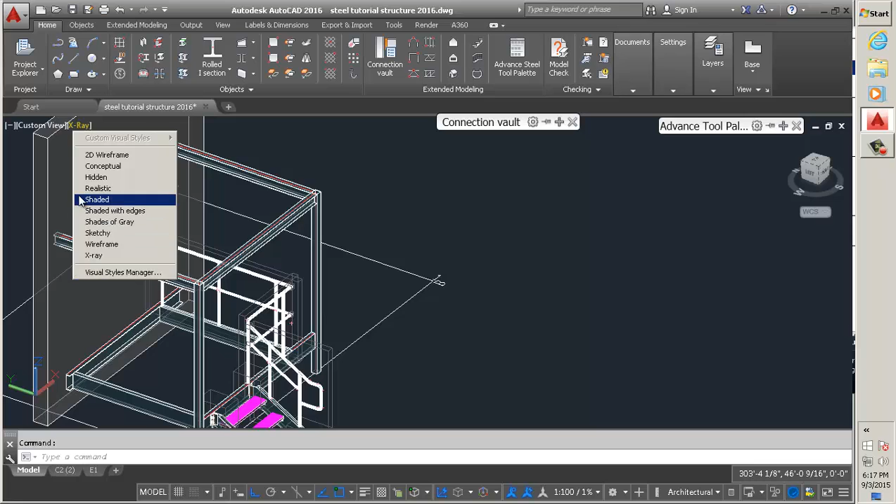And I've recalibrated my mic today. It's a bit louder than my last video, so I hope this works better.

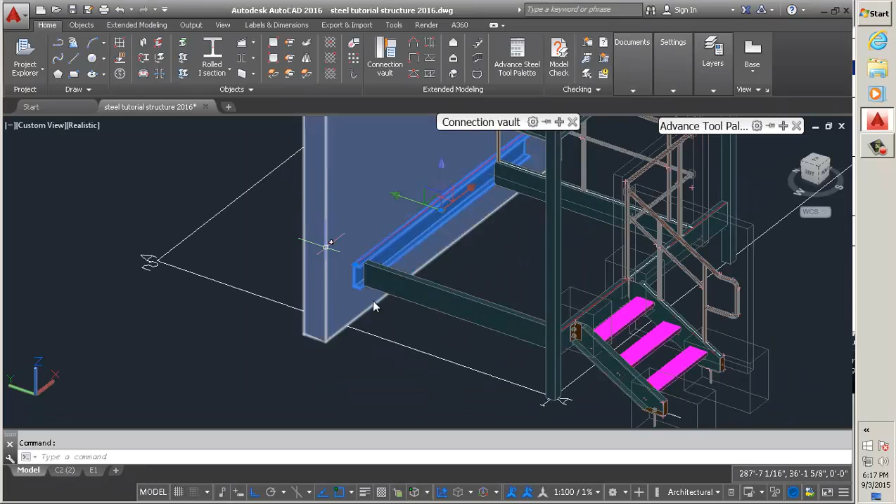Now, first things first, we're gonna start. I'm gonna connect that beam and that beam into the wall, as well as the channel down here. This is a structure I've never made before, so okay.

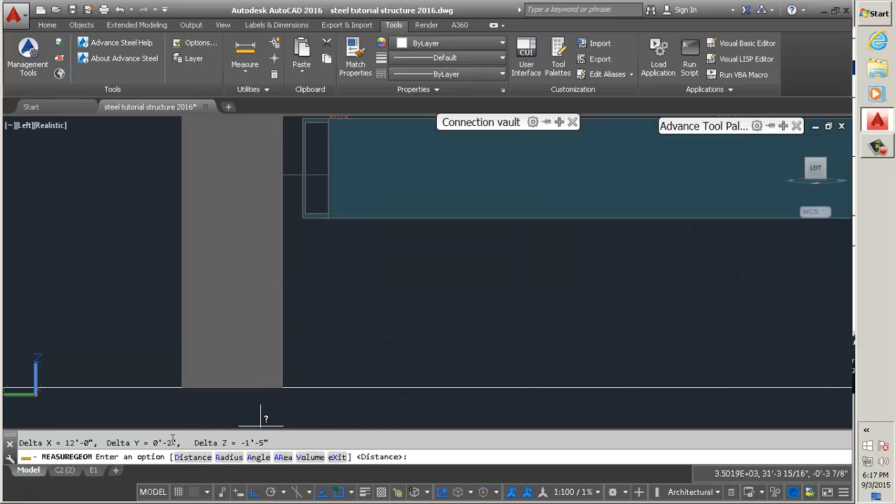Looks like our wall is away from the channel, so just move it in a little bit. We'll just take the measurement from there to there, which is in the y direction 2 inches. So we're just going to move our wall over 2 inches. Okay, so now it's flush, and we're going to go x-ray to see how our beams sit in relation to the wall, and you see they're just about halfway into the wall.

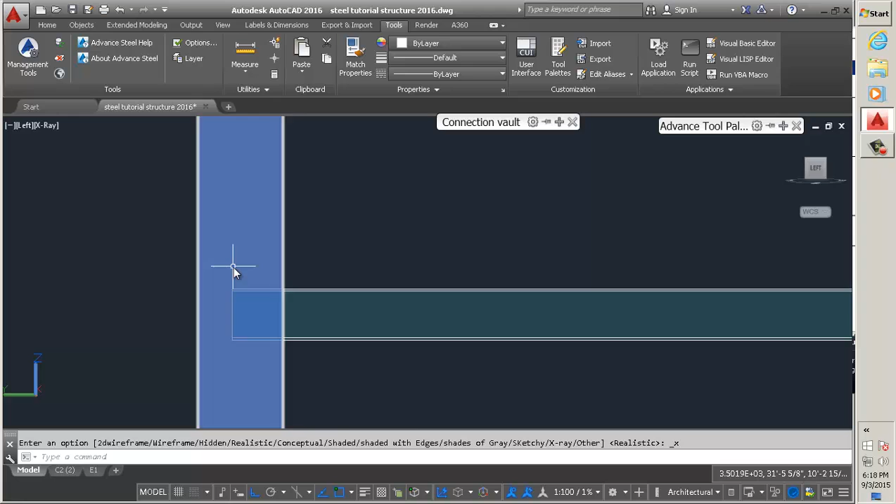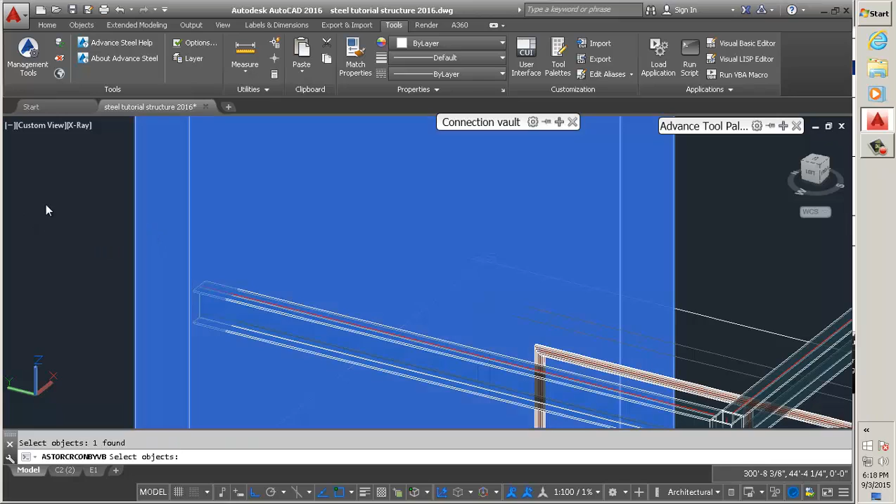Okay, this is my own connection. This is not structurally sound. I'd say it could be, but I don't know. Okay, so I'm going to use the embedded seat. Select our beam, right click, yes, I'd like to select the reference, and then that reference would be the wall. Right click, and I have my angle, my plate embedded into the wall.

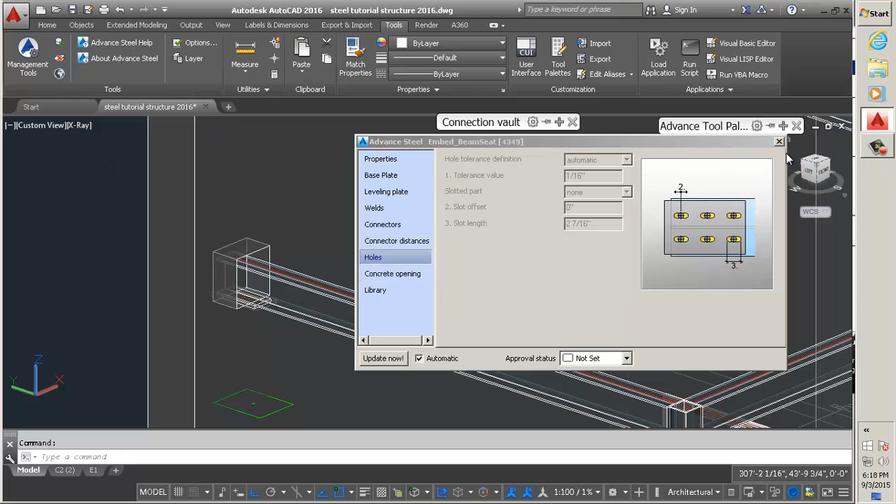But as you can see, the opening is not big enough, so we're gonna just expand that by about, say, 2 inches all sides. And hold on, we're gonna switch to the realistic view so we can have a look at that hole a little bit better, and it gives us a little bit of room here to stick in a welding rod and weld that plate to the beam on site.

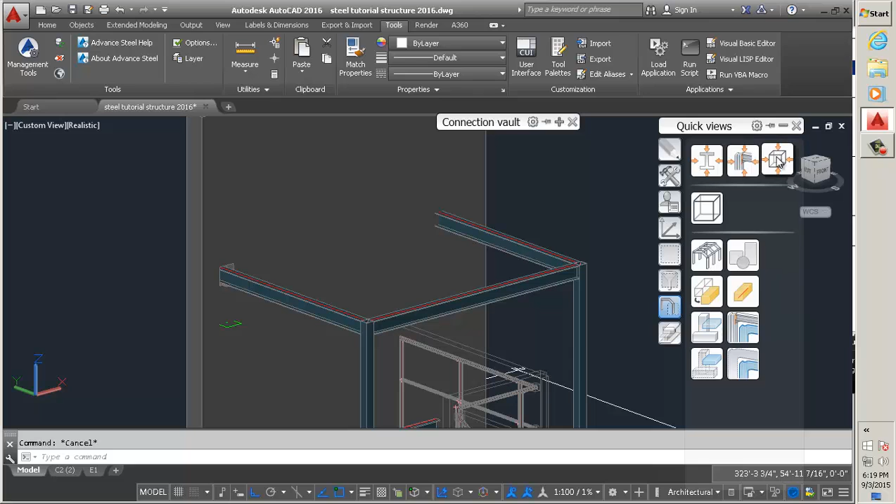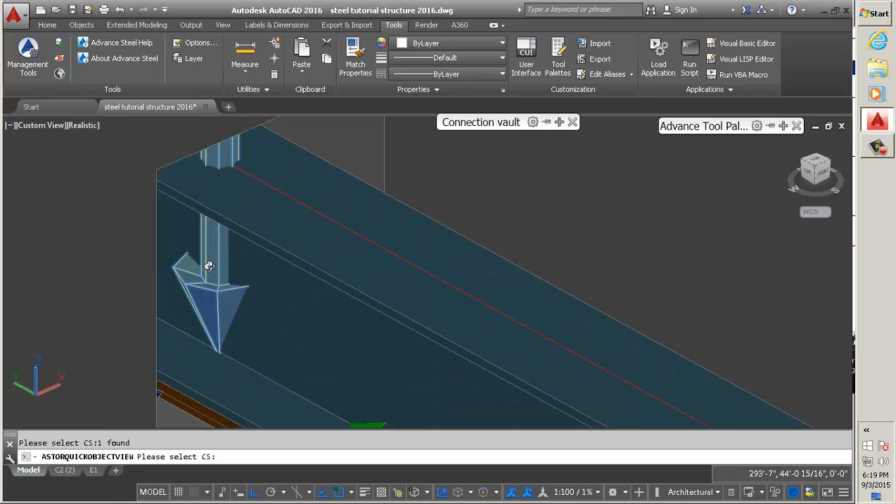Now I want to just focus on this connection, so another little trick for today will be using this button here. So you just click that and click the plate. I want to look at the plate, and then there'll be arrows that will pop up, this, that, and on the back side there should be top, bottom. Just pick any arrow and then right click and just hit enter, enter, enter 3 times.

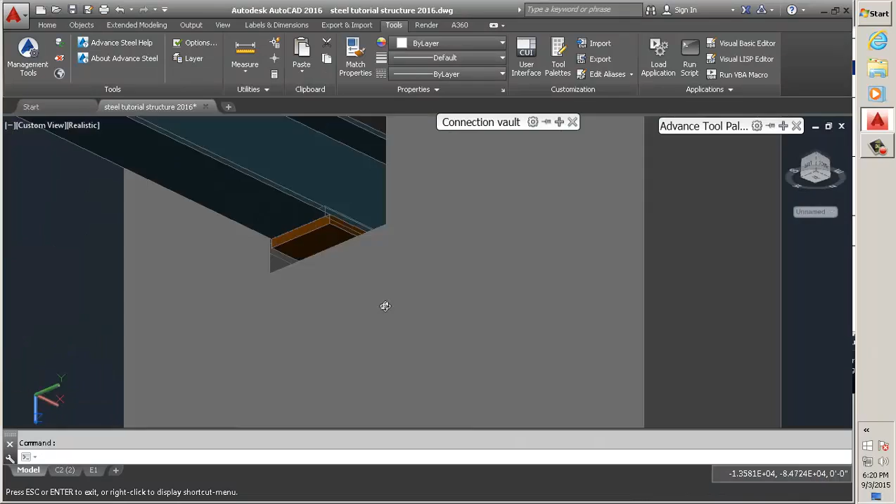And what that does is it takes away everything else and just leaves me that little 3 foot by 3 foot by 3 foot square, so I can maneuver around quite easily with just that little space in view. Okay, so now let's make this connection a little bit better. We're gonna need some anchors that will go into the wall, so we're going to add those.

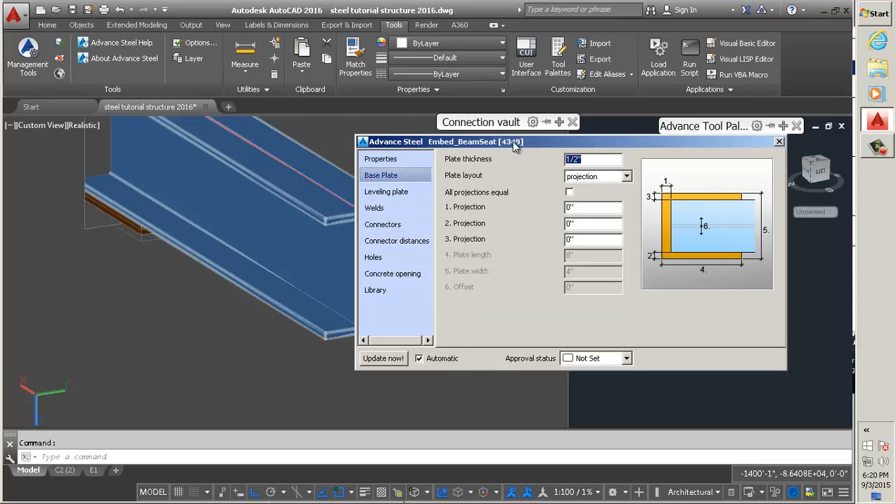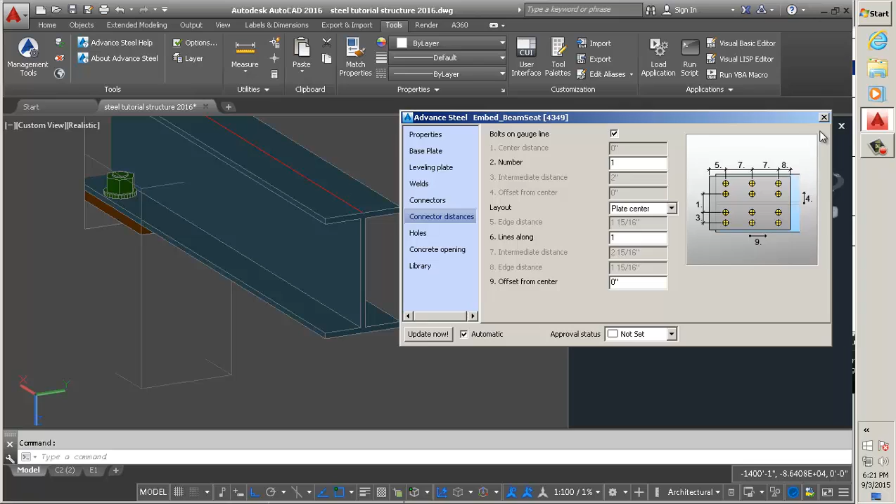First, let's check our base plate, thickness 1/2 inch, so 1/4 inch weld, double fillet on either side, site welding. Okay, connectors, we're going to want to put some anchors in there, but I think 2 on either side is overkill, so we're gonna bring that down to 1, and we're gonna take a look at what we have in the x-ray vision. Okay, it's upside down.

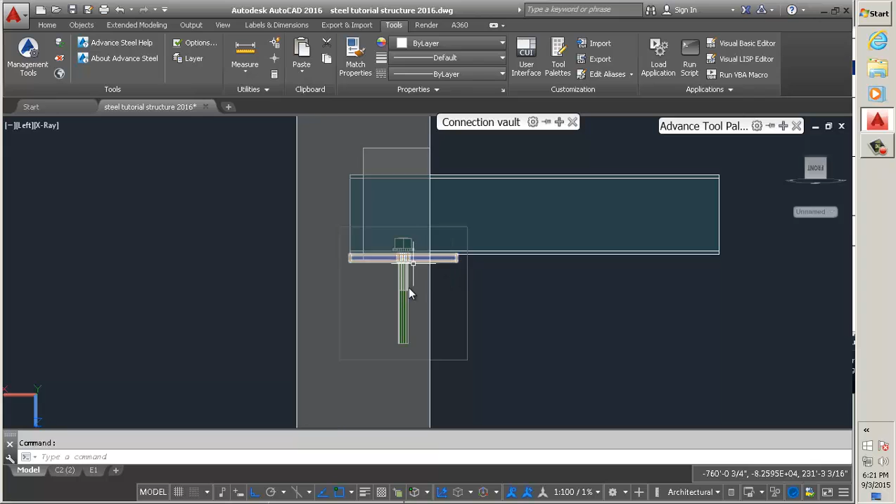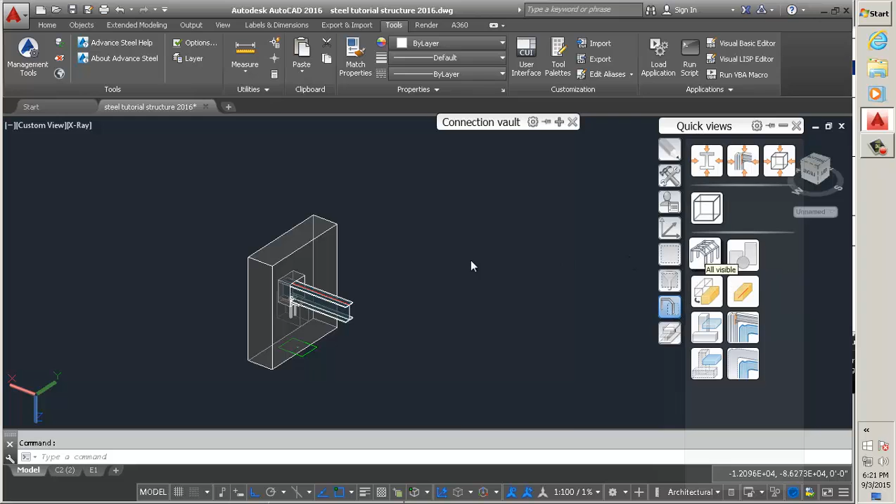Now we have our embedded plate, we have our beam right on there, it's welded on site, and we have an anchor into the concrete wall. We could reduce the plate size here, but for the sake of time we'll just leave it hanging out like that. Now if you wanna go back to the complete model, again on this tab here you click this button, and it just brings back everything.

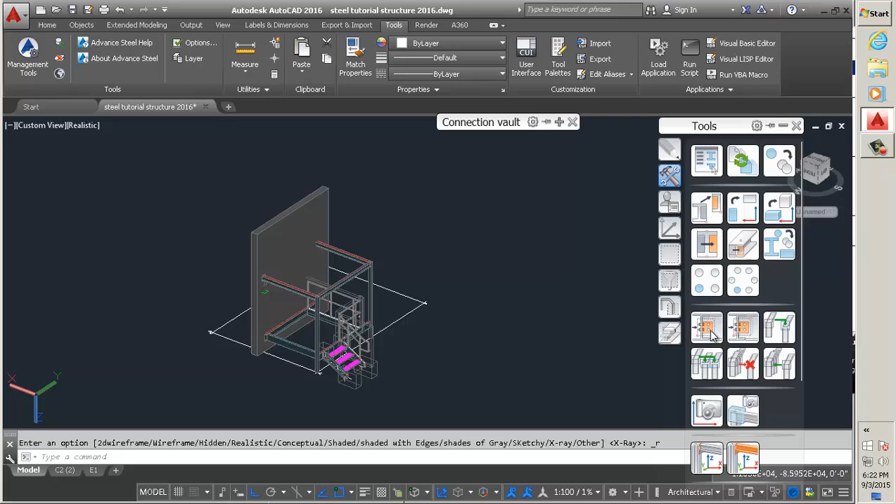And we're going to go back to realistic here, and we're going to transfer that connection to the other side, because this is the button that I preach all the time. Transfer connection template, great button they added. So select that plate, right click, select the beam, right click, select the reference point, yes, which would be the wall, and right click, and that connection is transferred perfectly onto the other side.

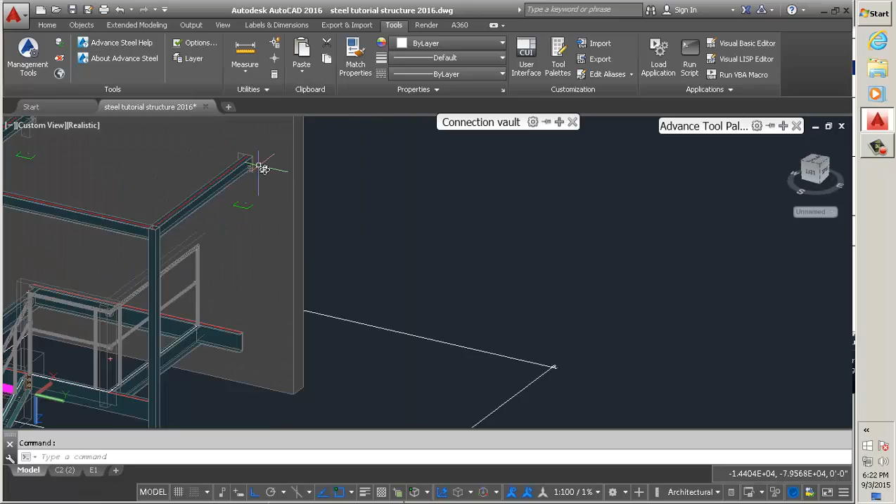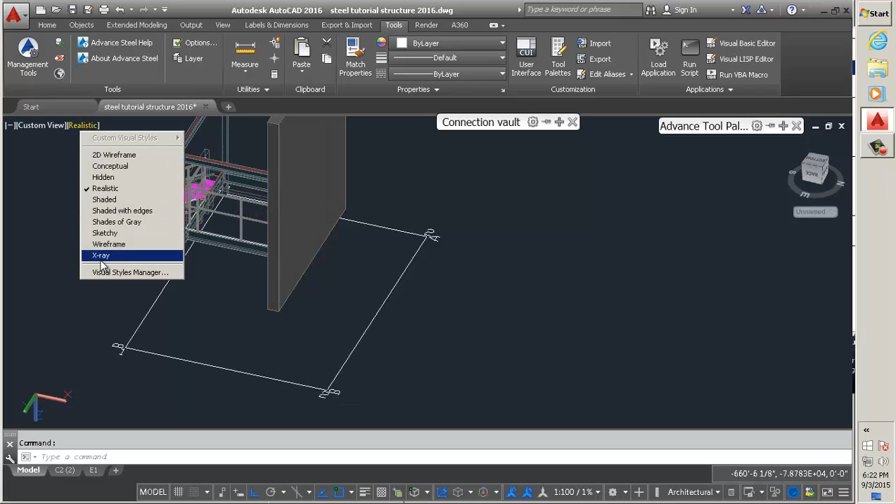Now sometimes you have a situation where you have a channel which is flush against the wall, and now you just need anchors to go in there and straight through into the wall. Now the easiest way to do that, first of all, you change that to X-ray so you can see through the wall, and then on your UCS, select place UCS on object, place it on there, and you want the X and Y plane to be flat on that channel. So we're gonna rotate about the X, and that's what we want.

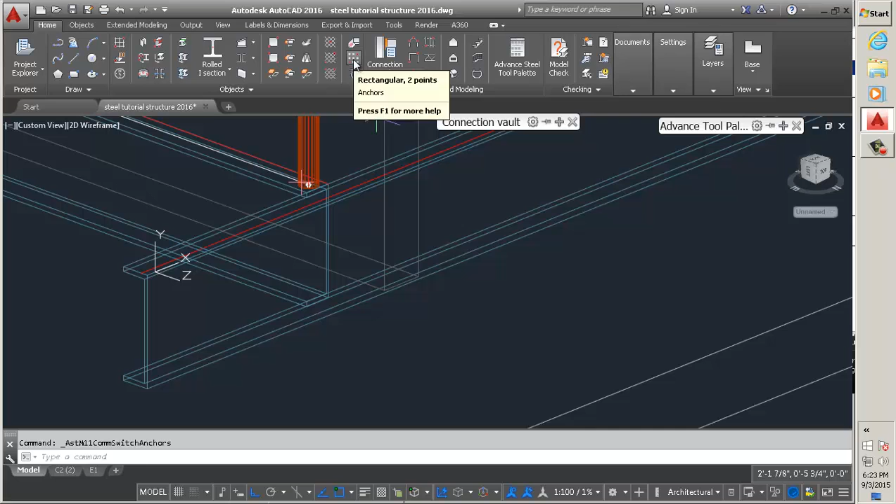And you go on your home tab here and you change this to anchors, which is just after the bolts, and click your button there, select your object, right click, and select the face. The reason why you change your UCS orientation is so that the anchors face the right way. Now right now they're facing the wrong way, so we just use the inverted.

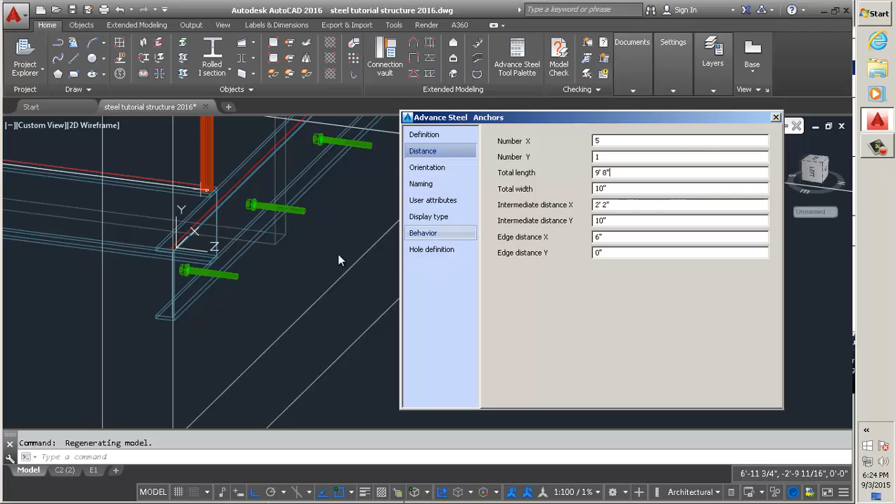Change our distances. I think we want 1 in that direction. Edge distance in the X direction, that's the distance from the beginning there, I would say 6 inches. And in between we want like 5 to make it, you know, a strong connection. Now we get out of that and we have our anchors into the wall and our beams on top connected with embedded plates. And that is the lesson for today, YouTube.